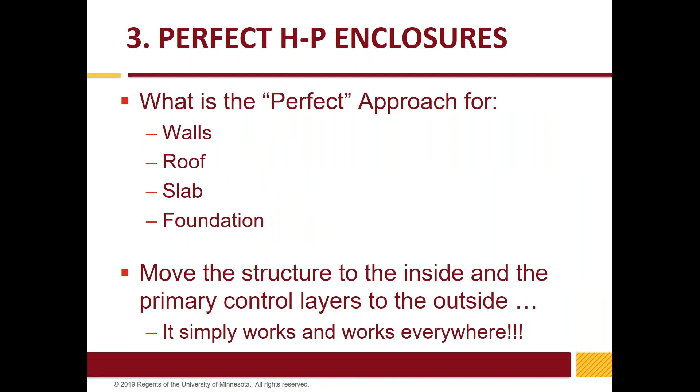All right. Great. So let's move on to the idea of the perfect wall. It really is simple. You bring the structural elements of the building inside and you put the primary control layers that we just discussed to the outdoors. Again, it goes by a lot of different names. The perfect wall has been credited to Joe Lstiburek, and he certainly popularized it. He gives credit to the Canadians for coming up with this concept in the 60s. Many other groups have picked it up and run with it with names like Persist and Remote, Perform, Outsolation. We call it ETMS, Exterior Thermal Moisture Management System.

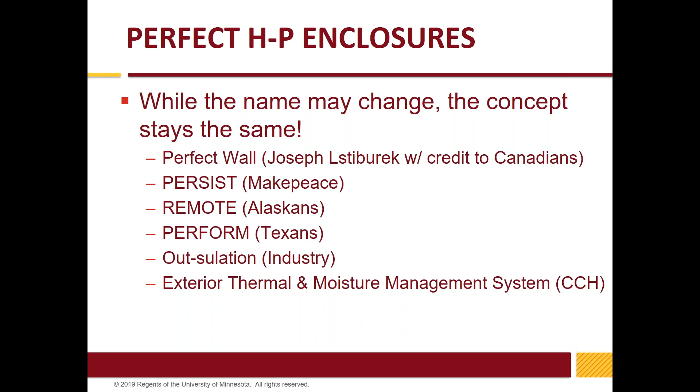It really doesn't matter. It's the idea of bringing the structure inward and pushing the control layers to the outdoors or the outside of the structure. And so again, in its simplest form, on a wall and structure, some type of control layer for air, water, and vapor, indicated in black, and some type of thermal insulating layer in the bluish color. Then a cladding that is vented and drained. It just doesn't get any simpler than that. And this wall simply works everywhere, all climate zones. It's just a very robust approach.

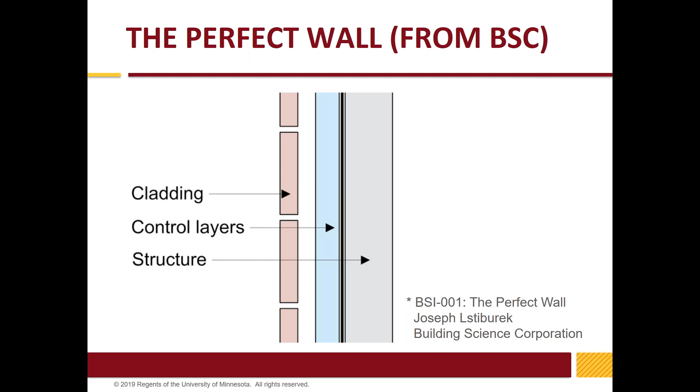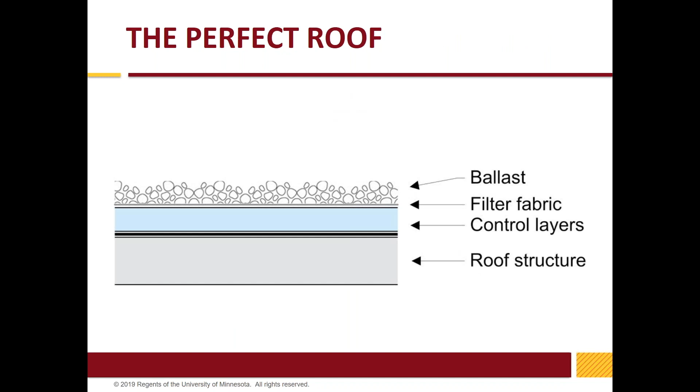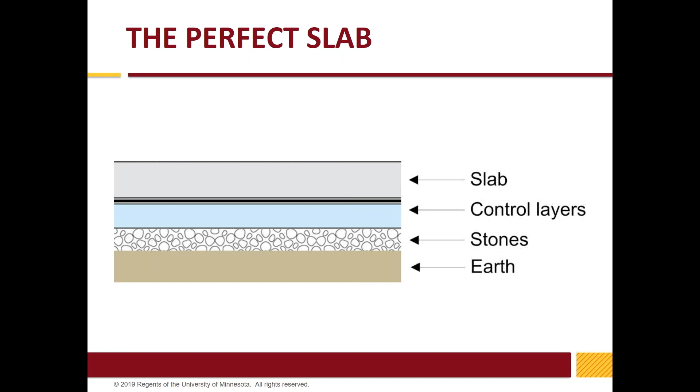Now, there are challenges, of course. We have to attach the cladding to the structure, so that requires some connections and some detail. But again, at this conceptual level, this is incredibly simple and simply works everywhere. And the same thing can work for a slab or a roof, and I won't go through those in great detail. I've got some slides here, but again, this concept will work for roofs, work for a slab: structure on the inside, air, water, vapor control, thermal insulation, and then in this case, drainage and drying with a drainage layer under the system and then the earth.

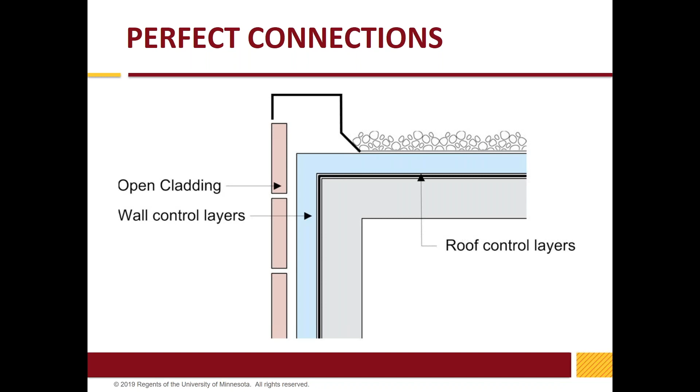Well, it's all well and good in the field, in the plane of the wall, roof, and slab, but we have to connect things. That's why we use the pen test. The idea of how we carry the continuity of these control layers through our construction details is critical, of course. And I'll show you some details on that when we get into our example systems.

So put the structure on the inside, and in a way, I use this story of the 3 little pigs. Use whatever you want to hold the roof up. It could be light frame, steel, wood. It could be timber frame, concrete masonry. You could use a thin SIP. I'm going to introduce a system that we're using called the solid panel system that has no studs at all. The point here is to just focus on structure. Getting yourself a structure that's rigorous, robust, meets codes, is resilient to wind and storm events, etc. And then we'll move on and put the thermal, moisture, and air control layers on the outside.

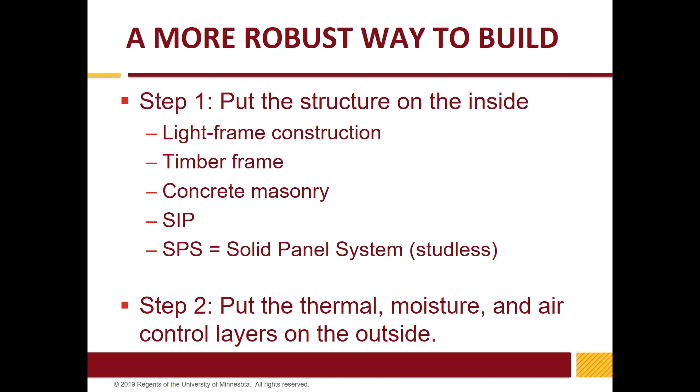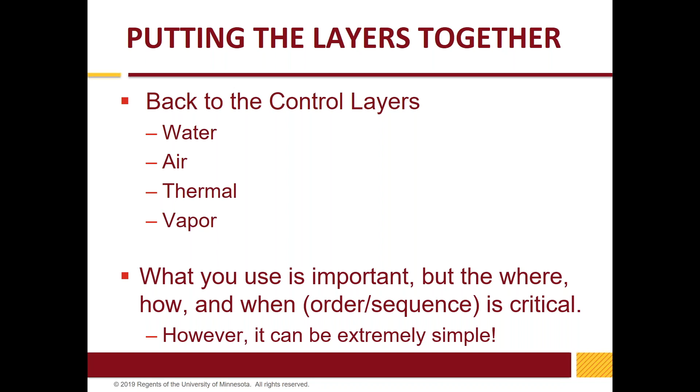So it is important to now think about those control layers. What are they? That's important, but as equally important is how and when do they get put on. The whole idea of the sequencing, the construction process is critical. I'll just show you again some conceptual details.

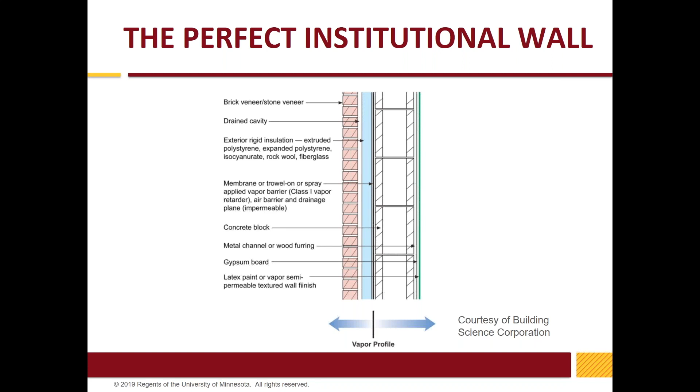Again, I borrowed this from Building Science Corporation; it shows the institutional wall with a masonry structure, the exterior control layers, and a brick veneer. And this is a timeless wall that will last forever. You'll note at the bottom of the illustration, the vapor drying direction is illustrated here. The inside can dry to the inside, the outside elements will dry to the outside in the vented cavity behind the cladding.

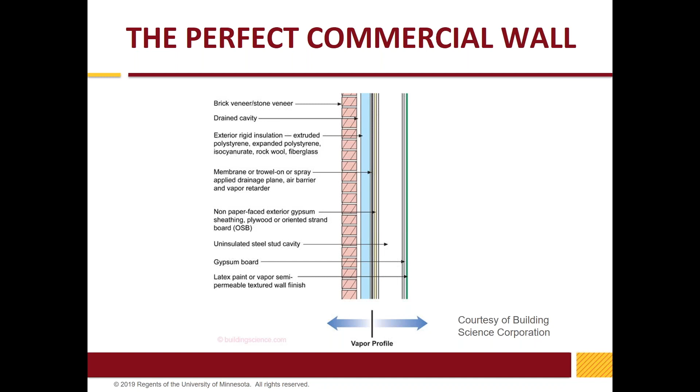A commercial wall, steel stud. Don't bother insulating the inside of the steel stud. That doesn't work very well because of the conductivity of the steel. Again, you'll put your sheathing, you'll put your control layers, you'll put your insulation and vented cladding. And again, it could be brick, it could be some other type of material. Again, with a vapor drying potential in both directions from the air-water vapor control layer.

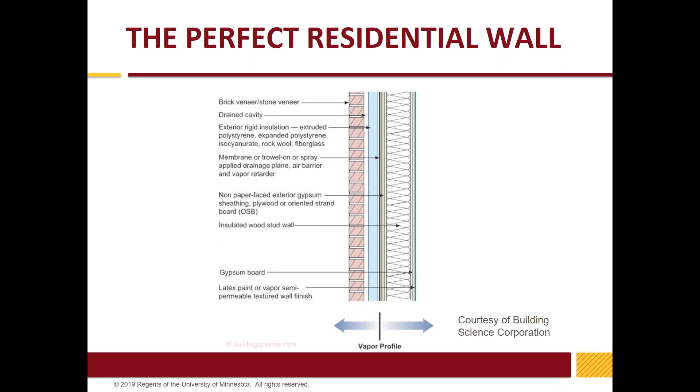Here's a residential wall, and just for illustration purposes, brick was used here again. Clearly, it's not the most common cladding, but put clapboards on the outside on a furring strip. Everything still applies. In this case, it is a hybrid insulated wall. It's using wood framing, and so you can insulate the cavity to some extent. We'll talk a little bit about the rules for that here in just a second.

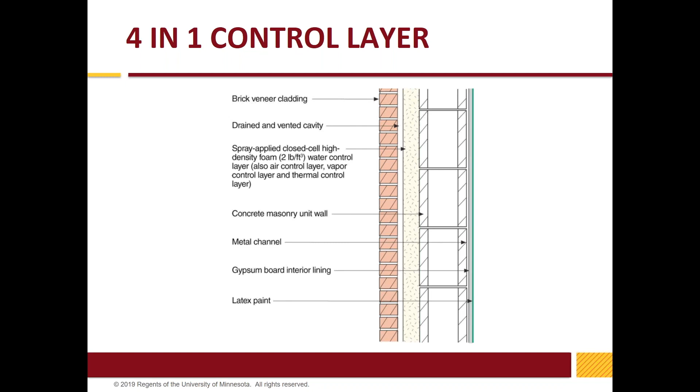I just want to briefly introduce this concept of the hybrid wall and essentially why folks want to move to, or should move to, exterior insulation. Essentially what you're doing is trying to warm up the first condensing plane, which in this case we'll call our sheathing of our frame wall system. And by adding sufficient thermal insulation to the outside, that warms up the sheathing temperature.

Once the sheathing temperature gets warm, essentially above the indoor dew point, then the necessity for an interior vapor retarder on the cavity or an interior air barrier to prevent that air from reaching the condensing surface goes away. And so what that does now is it starts to free up the thought about what happens on the inside, and outlets and all those interesting problems go away, and we can now put our air, vapor, and water control in the middle of the wall, but we have to add enough exterior insulation to keep that location warm.

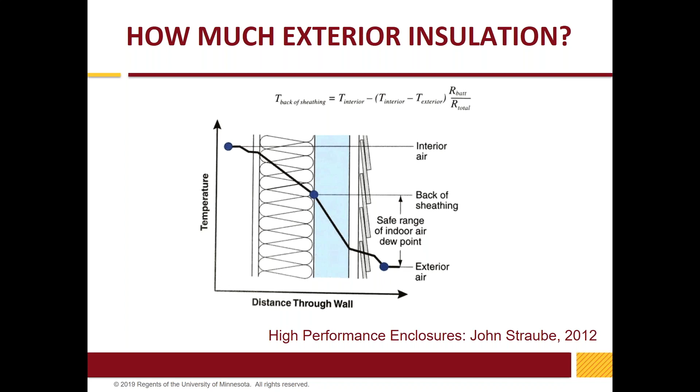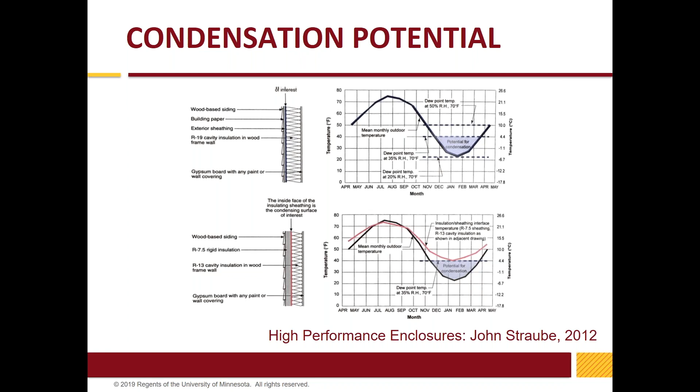It's very simple. I'm not going to go through this because I'm short on time here, but I simply will add that you can look at this later and you'll just see that this warms up the sheathing and brings it out of potential for condensation, whether it be due to diffusion or even air transported moisture across the cavity. It also allows you to use less expensive cavity insulation to get a portion of your insulation value. And again, you'll see that play out in our final walls, or at least two of them.

But if you're in normal conditions, and by the way, for the outdoor temperature, you can use the average temperature for the coldest month. In our climate zone, we're talking about a reasonable indoor humidity of 35% and outdoor temperature 14 degrees. We're talking about basically 50% external to interior insulation, half and half.